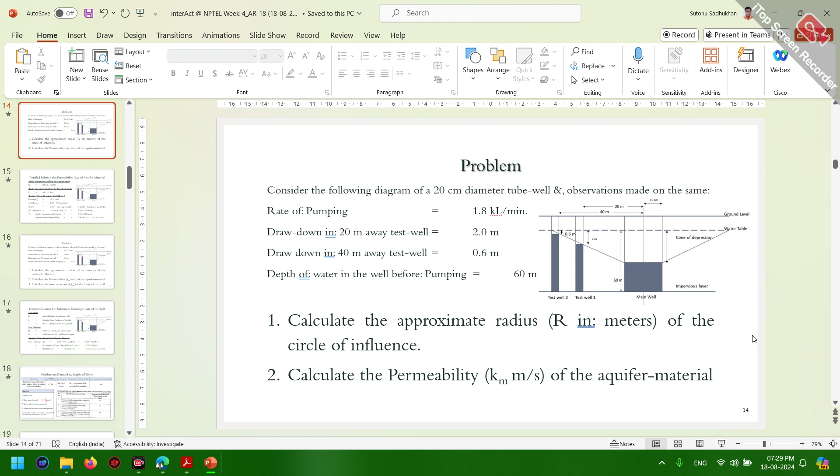Because if nobody joins, we won't have to wait for people to answer. That's why we are waiting. We will start after 1 minute or so. So in the meantime, let me share my screen. And for the sake of recording audio, I will be commenting on the slides.

Okay, so nobody has joined. I'll not turn on my camera. So let's start.

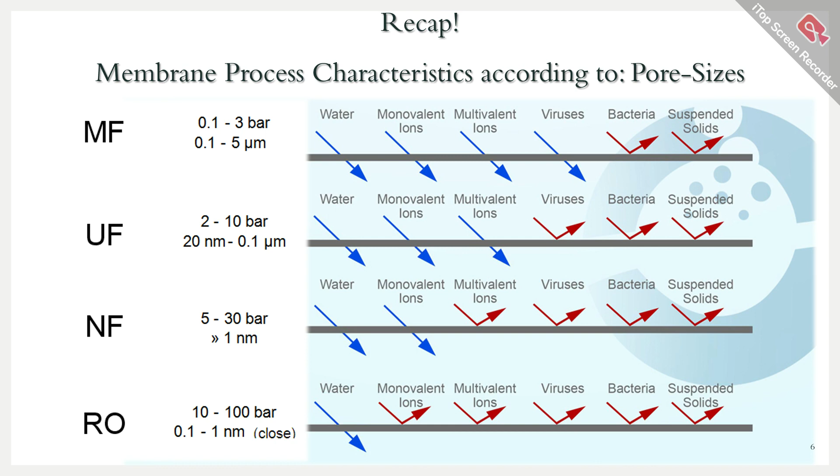Moreover, above ultrafiltration, in case of nanofiltration, the multivalent ions which cause hardness are retained. And in case of reverse osmosis or RO, even monovalent ions are retained, and almost distilled water comes out. We also discussed the different ranges of pore size and the pressure applied for filtration through these different types of membrane modules.

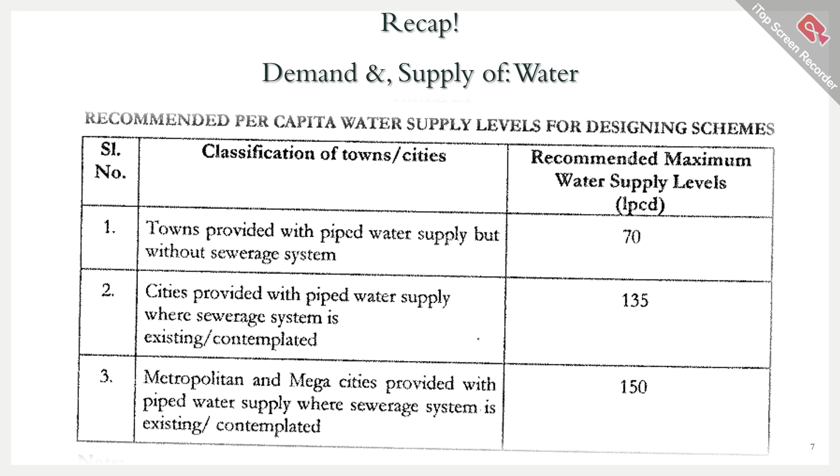We also promised in the last class that we would discuss a problem based on the demand and supply of water. There was a table given where recommended per capita water supply levels for designing a scheme was given. So we were supposed to start a problem based on this table, but unfortunately one student approached me on social media saying he has a doubt regarding one aquifer problem.

The problem is based on an aquifer, and he was not getting the correct answers. So I prepared a detailed explanation for the aquifer problem so that people get confidence, and even if there is some problem with the question, people can identify that themselves and answer accordingly, or be confident whether, if the answer is not matching any of the options, they will be given marks, or everyone attempting will be given marks. So anyone of that can happen, but I strongly encourage you to know the basics so that you are confident enough to answer, even if the correct answer is not given in the options.

Okay, so now let's start with that problem. The above problem we will discuss at a later stage. So first I will discuss the principle of hydrostatic equilibrium of liquid. What is it? The equi-hydrostatic property of water, basically.

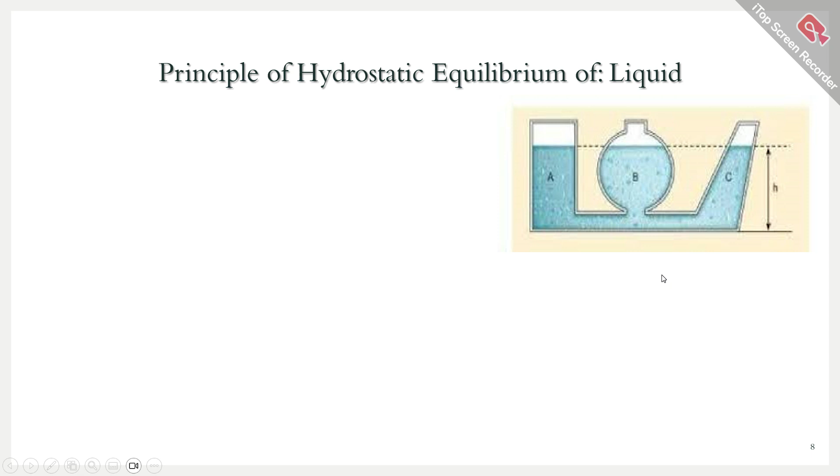This principle is used for extracting water via artesian well. There are different types of layers inside the earth's crust. If you see the interior core of the earth, at the outermost layer there is crust soil, which is a part of the earth's crust.

Inside the earth's crust there is the mantle layer. Mantle has two parts: one is outer mantle and another one is inner mantle. And even inside the mantle layer, at the center point of the earth, there is the earth core. The earth core can also be divided into outer core and inner core.

So the points we are talking about are situated at the earth crust level, not at the mantle or core level. So let's say at the earth crust level, there is groundwater present, and groundwater recharge happens if the lithographic structure of the earth is like this, then it may charge from the surface.

Rainwater may come, and you can see there are different types of stratas, like impervious strata, which is not a very good conductor of water, but the pervious strata is permeable to water. So through the pervious strata, water will come into the ground with the help of rainfall from the surface of the ground. But through the impervious strata, water will not come.

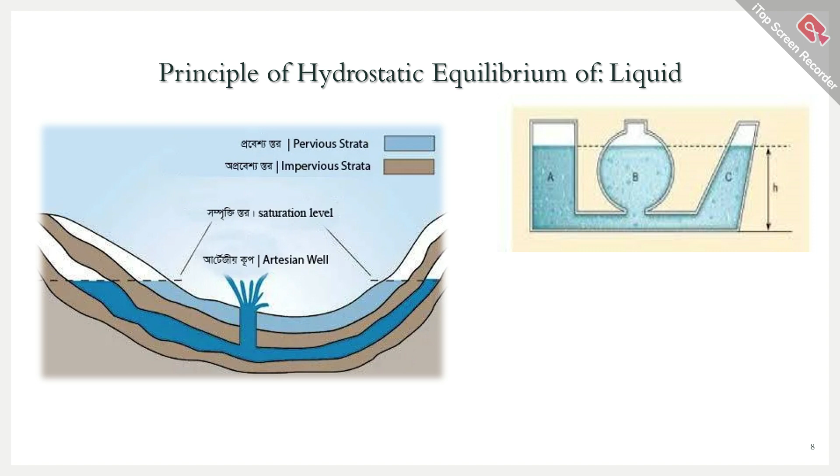In this way, if there is a rock mountain at the valley, people can get water with the help of these artesian wells. Now, this principle of hydrostatic equilibrium is also applied in many engineering cases, just like hydraulic lifting and domestic water supply from municipal tanks.

The tank is situated at a particular height, and from that height, the water is basically at the starting level. First, from the water source, the water is treated and pumped to the overhead tank, and from that tank the water is supplied to the household via the tap.

If the tap is open, due to the hydrostatic equilibrium principle of water or liquid, the water will try to attain equal height in households similar to the tank level.

So if the tank is above the highest households, then households will get the water. But if the tank is below the height of the highest household, then the highest levels of the households may not get the water.

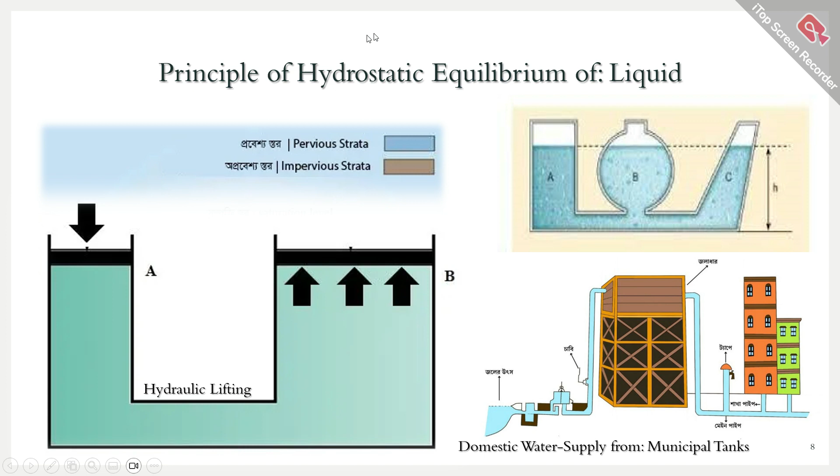So this is the hydrostatic equilibrium of liquid. Sometimes what happens, if the pipeline is very long, friction pressure drop also occurs, or if the pipeline is a lot branched. Then also, due to the pressure drop, the water doesn't reach the equivalent height of the tank. But if we assume zero pressure drop through the pipeline, then the water should achieve the equal height of the tank. So this is called the hydrostatic equilibrium principle of liquid.

Then only from the bottom the water will enter. So now the aquifer or groundwater pocket that is situated between two confining beds or impermeable rock layers - what will happen is the aquifer present in between is called the confined aquifer, because it is confined between two confining beds.

But if only one side, the lower side of the aquifer, is surrounded by the confining bed, while the upper side of the aquifer is open to the atmosphere, then it is called an unconfined aquifer. So it's not always open to the atmosphere - the upper layer is basically not confined by any rock. It may be confined, it may be open, or it may be confined with a permeable soil.

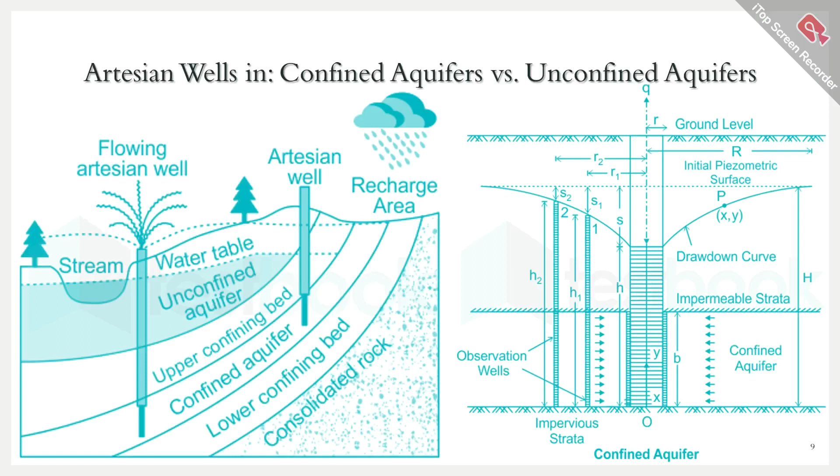So for the confined aquifer, if we look at the governing equations, those are given by Thiem's formula. Under this formula, discharge Q, that is volumetric flow rate, is given as 2 pi b km into capital H minus small h, divided by ln of capital R by small r, where km is nothing but the permeability of the aquifer material.

Capital H is the maximum height of the water bed below the ground level, and small h is any height that is smaller than or equal to capital H, which is basically - if we try to withdraw water through the well, there will be a cone formation.

It is nothing but a hydrostatic gradient. So the water height at a particular location, at a particular small r distance from the center point of the well, if we try to find out the cone height with the help of digging a test well, then at a distance small r from the center point of the well, we will find the height small h, which is the height of the water cone at that particular distance small r from the center point. So this is the explanation of this formula.

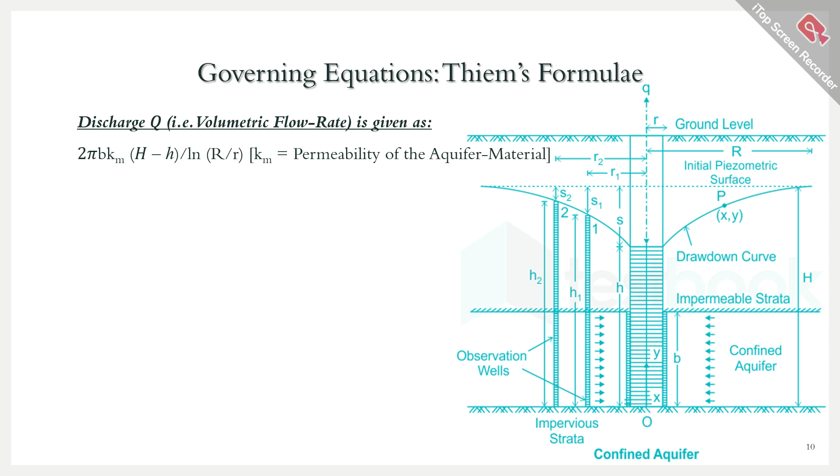Now in case of unconfined aquifer, where there is no impermeable or impervious strata present inside the aquifer, it is basically open. The governing equation that gives the discharge in case of this aquifer is given as q equals pi into km, this 2b term is not there, whole into capital H square minus small h square, divided by ln of capital R by small r. If we simplify this pi km and ln, it gives you capital K into capital H square minus small h square, divided by log of capital R by small r.

Where this capital K is written in terms of km, that is the permeability of the aquifer material, which is nothing but capital K equals pi into km divided by 2.303, the aquifer transmission coefficient or constant. So the aquifer transmission coefficient is a function of the permeability of the aquifer material, and this function differs for unconfined versus confined aquifers. In case of confined aquifer, K confined equals 2 pi b into km divided by 2.303. And in case of unconfined aquifer, K unconfined or Ku equals pi into km divided by 2.303.

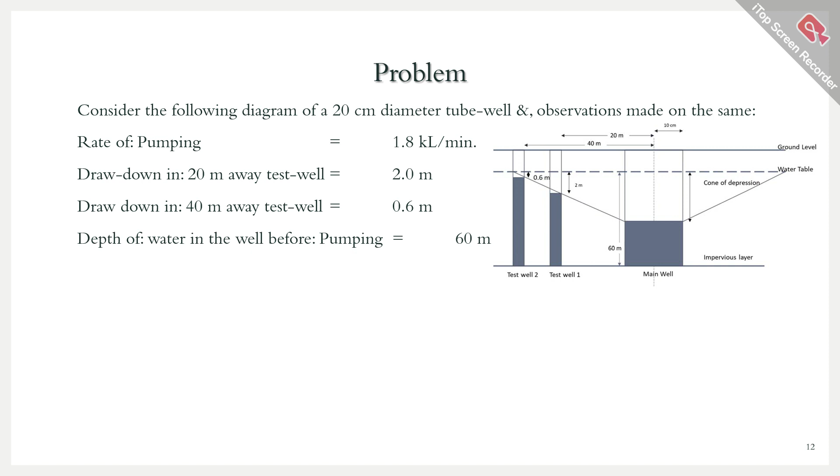Drawdown in the 20 meter away test well is given as 2 meter. Drawdown in the 40 meter away test well is given as 0.6 meter. Depth of water in the well before pumping is 60 meter.

So we can assume that before the starting of pumping, the water was at a 60-meter height in the main well. After starting of pumping, beyond the zone of influence of the cone, the water height will be 60 meter.

Drawdown of the 40-meter away test well, that is test well 2: the drawdown means 0.6 meter, so the water height is basically 60 minus 0.6 meter, that is 59.4 meter for test well 2.

And for test well 1, the drawdown is 2 meter. That means the water height in the column based on the cone in test well 1 is 60 minus 2 meter, which is 58 meter.

Now based on the observations, we have to calculate the approximate radius R in meters, which is the radius of the circle of influence.

There will be a point where the water height will be 60 meter. Beyond that point, at every place, the water height will be 60 meter. So we have to find that particular point.

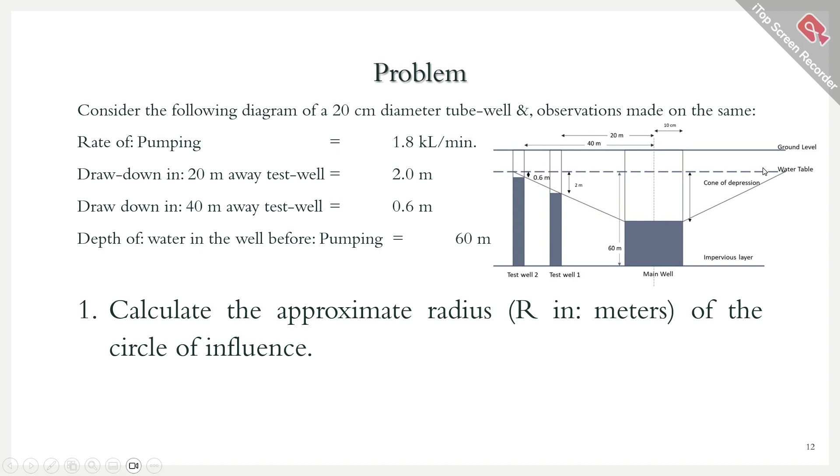The distance of that point from the center point of the main well will be the capital R. That is nothing but the approximate radius of influence, or radius of the circle of influence. So let us find out the detailed solution for the radius of influence.

If we apply Thiem's formula for unconfined aquifer, it is something like this: Discharge Q equals capital K, which is the constant or coefficient, into capital H square minus small h square, divided by log of capital R by small r.

With respect to test well number 1, which is 20 meter away from the center point, discharge Q equals K into 60 minus 58 square divided by log of capital R by 20. Here small h is the height of water inside test well 1, and small r is the distance of test well 1 from the center point, which is 20 meter.

So if we calculate the discharge Q with respect to test well 1, this will be the formula. At capital R, which is the radius of influence, the height of the water is 60 meter, if we can draw a hypothetical test well at the radius of influence of the cone.

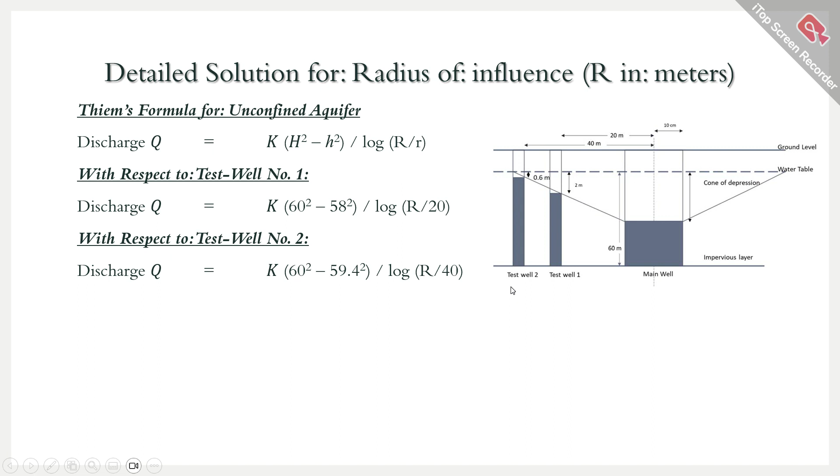So the minimum radius from where the water height 60 starts getting established, that place is basically the radius of influence, the distance of that point from the center point. At a distance of 40 from the center point, the water height inside test well number 2 is 59.4 meter.

Then equating both the above, because the test wells are just to measure the height of water based on the surface of the cone when we are drawing water from the main well, all the discharges will be basically the same, whether calculated based on test well 2 or test well number 1. That doesn't matter.

So discharge Q will be: K into 60 minus 58 square divided by log of R by 20, equals K into 60 minus 59.4 square divided by log of R by 40.

Okay, so just forget about the discharge K, cancel out K from both sides, then things become something like this. 60 square minus 58 square becomes 236. Whole into log R by 40 comes at the left hand side, which becomes log R minus log 40 equals to 60 square minus 59.4 square becomes 71.64, and log R by 20 comes from left to right and becomes log R minus log 20.

236 minus 71.64, this log R's coefficient comes at the left hand side, whole into log R equals to this 236 minus log 40 comes to the right hand side and becomes positive: 236 into log 40 minus 71.64 into log 20, which was already present in the right hand side.

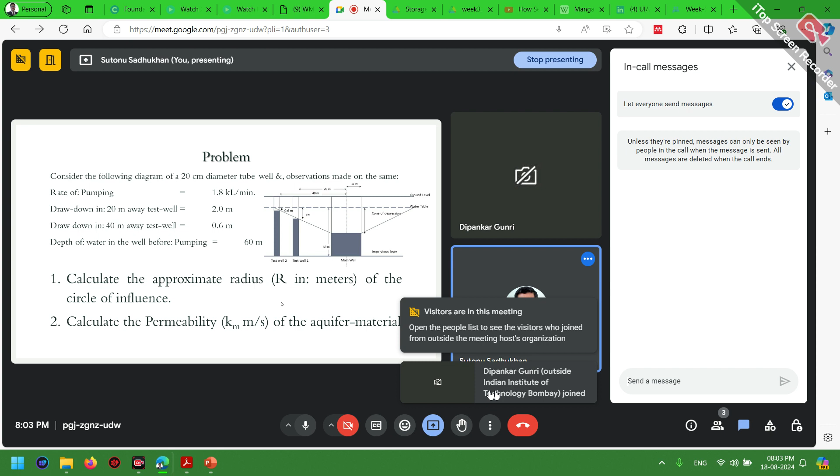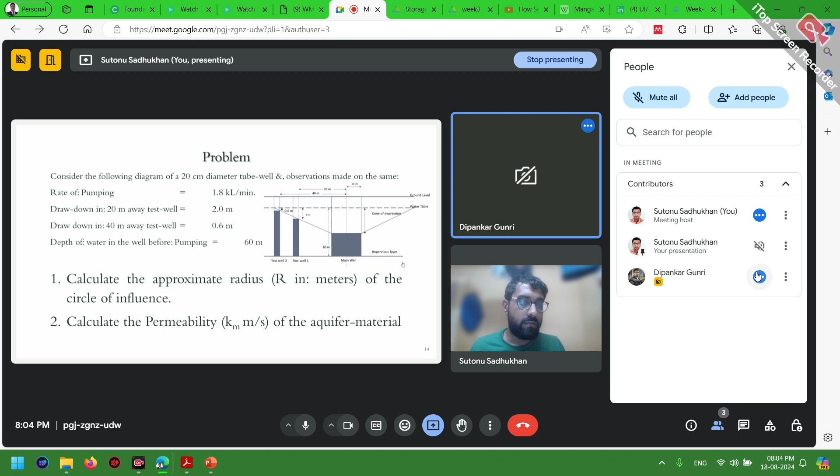Welcome Dipankar. Previously basically nobody joined, so I was just continuing for the sake of recording. I will just repeat the things once again for you. One student was there who actually contacted me stating... do you want to say something? Okay. So one student was there who basically contacted me stating... yes, please. Okay. So that student... Dipankar has left. Okay, let me continue. If he joins, I will brief him the introduction.

So now detailed solution for permeability Km of the aquifer material.

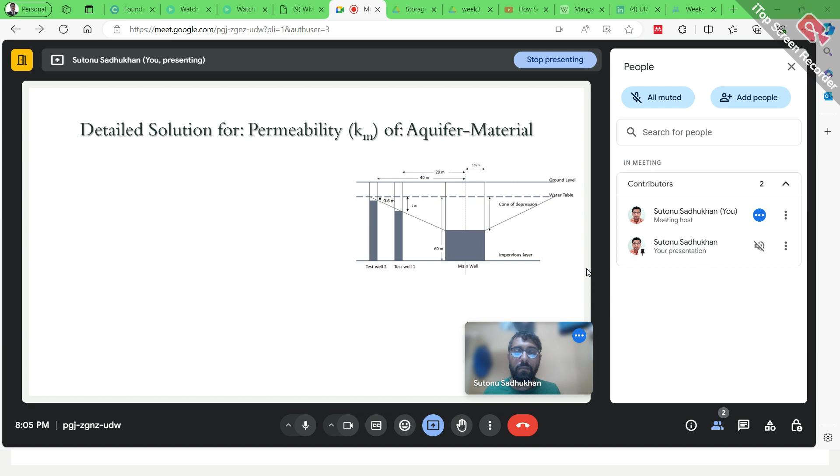Let me switch off my camera. No need, okay.

So aquifer transmission coefficient for confined aquifer is given as Kc equals to 2 pi b into Km divided by 2.303, that we have seen earlier. Now aquifer transmission coefficient or constant for unconfined aquifer is given as Ku or K equals to simply pi into Km divided by 2.303. So basically Ku into 2b equals to Kc, or Kc equals to 2b into Ku. This also you can infer from these two formulas. Or simply Kc equals to 2 pi K, 2bk.

So now applying Thiem's formula to test well number 1, you can apply that to test well 2 also, or you can apply that even at the radius of influence also. If you apply it to test well 1, then discharge Q becomes 1.8 kiloliter per minute, which is nothing but 1800 liters per minute, right? Which is nothing but equals to, based on the formula, capital K into capital H square minus small h square divided by log of capital R by small r.

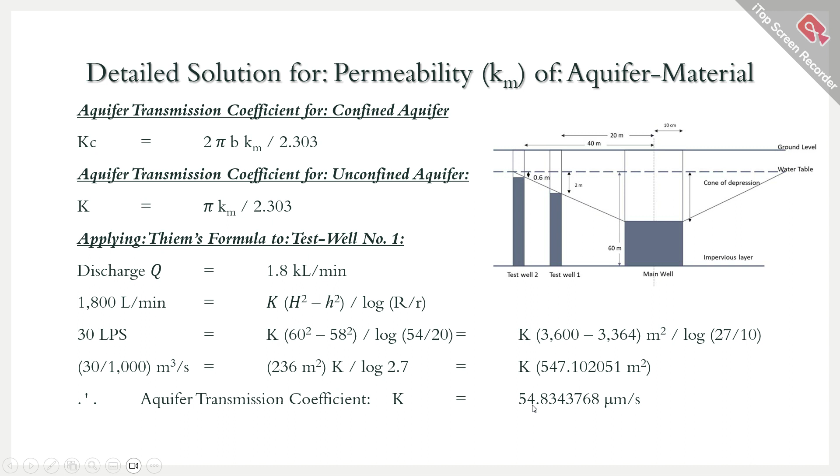Hence, aquifer transmission coefficient K is nothing but 0.03 divided by 547.102, which is nothing but 54.835 micrometer per second. Micro means 54.83 into 10 to the power minus 6 meter per second. This unit will be meter per second because meter square and meter cube get cancelled, becomes meter per second. So, 54.834 into 10 to the power minus 6 meter per second, that means micrometer per second.

From the aquifer transmission coefficient of unconfined aquifer, we can get the value of the permeability of aquifer material, which is nothing but small km. This small km becomes 2.303 into capital K divided by pi, in case of unconfined aquifer, which is nothing but 54.834 into 2.303 divided by pi, equals 40.2 micrometer per second. Units remain the same for pi, and 2.303 has no units, so units remain the same.

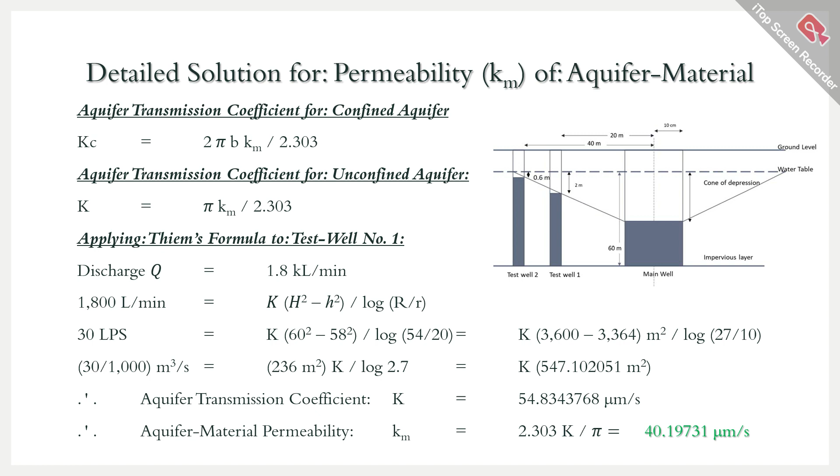Hope it is well understandable. So we have calculated the permeability in this way, which is nothing but 40.2 micrometer per second for the aquifer material. Now the third question is...

Based on whatever we have calculated till now, we have to calculate the maximum rate, that is QM, of volumetric discharge of the well. So what will be the maximum rate?

As we gradually withdraw water, the rate will decrease, right? But when the height was 60 meter, that 60-meter height is where it is at capital R, which is nothing but your radius of influence. There, the rate will be the maximum. Based on that, we will now go through the detailed solution for maximum discharge rate of the well.

To calculate that, first we will again revise whatever data are given. Capital H is given as 60 meter, which is at the radius of influence, that is capital R. At the radius of influence, the height is capital H, which is nothing but 60 meter. Small h is 0 meter for maximum discharge of the well, because we are calculating the maximum discharge, not the high water, where the discharge is maximum at that moment of time, the small h will be 0.

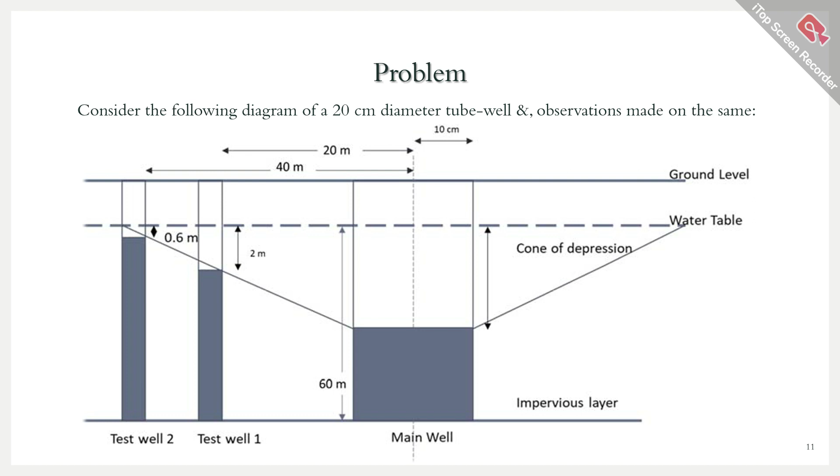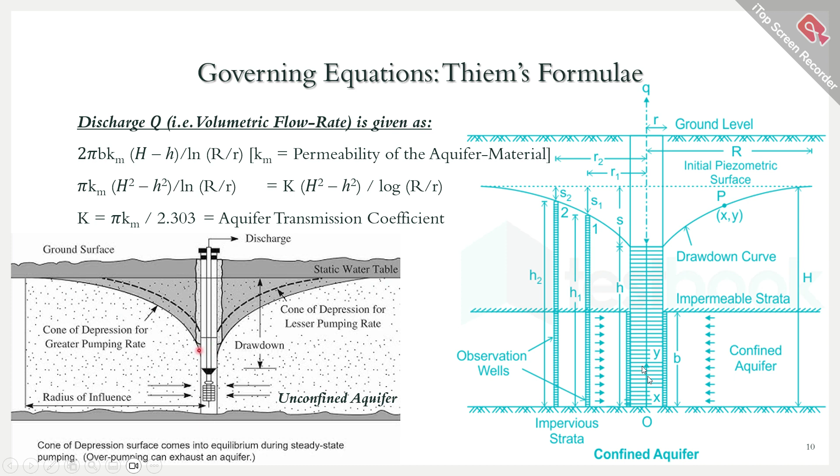The cone is actually not shown very well here, so it will be something like this, a slopey nature. We can go back to the earlier picture. At radius small r, which is 0.1 in our case, at 0.1 distance and below also, from 0 to 0.1, around the center point of the main well, the height of the water will be basically almost 0 for maximum discharge. So it is kind of a slope, not a straight line as it is shown.

So at that particular height, what will happen? We are coming into that. So small h will be 0 meter if we are withdrawing water at a maximum. Now small r will be, as I told, 10 centimeter, that means 0.1 meter, which is the radius of the principal well.

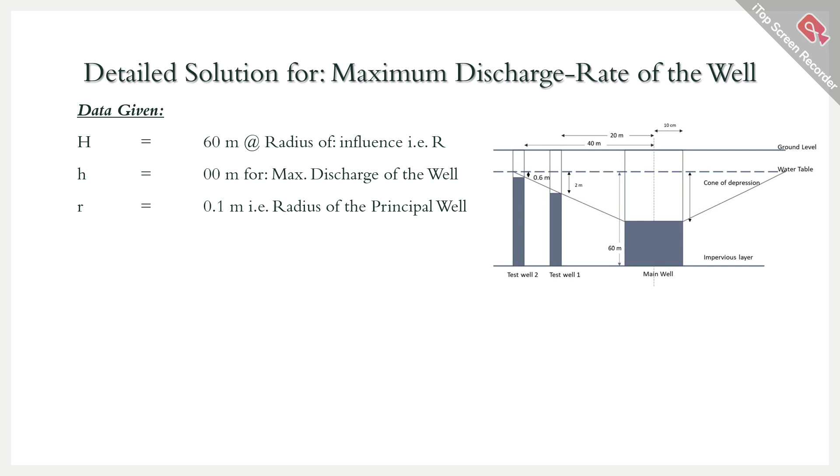That is the radius of the principal well. So there is one problem here: it will not be 10 centimeter... no, 10 centimeter means 0.1 meter. Yes, it's 0.1 meter. Yeah, it is correct. No issues with that.

So the data obtained that we got while solving our previous two problems: it is capital R, the radius of influence, at capital H, the height of the water, at y direction is capital H. Then the x direction, radial direction, becomes 54.11 meter, which is nothing but the radius of influence. Now capital K, the AT coefficient, that is aquifer transmittance coefficient or constant, is 54.83 micrometer per second, which we calculated earlier. Based on these two things, the data given and data obtained, we are going to apply Thiem's formula for volumetric flow rate.

So, for maximum discharge QM, K into capital H square minus small h square divided by log capital R by small r, will be K capital H square divided by log capital R by small r, because small h is 0 here for maximum discharge of the well. So, it becomes 0. K H squared by log R by r. It becomes the expression of the QM.

Upon simplification, we just put the values of K, which is nothing but 54.83 micrometer per second. Now, capital H is 60 meter. 60 meter whole square divided by log of capital R by small r.

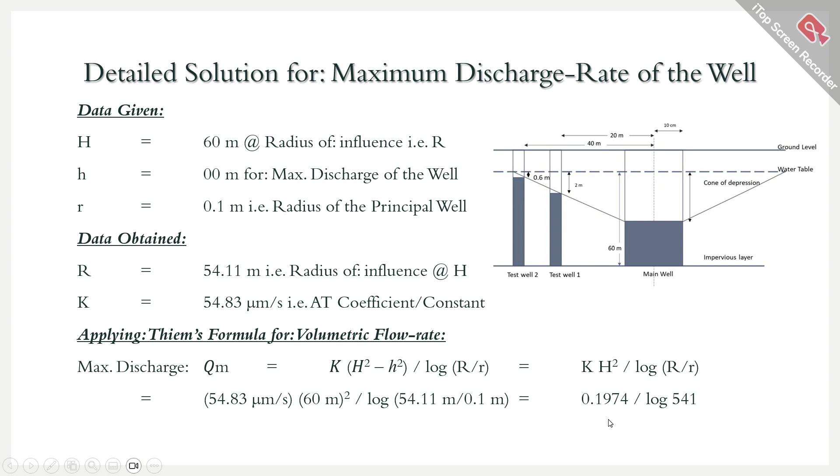Now, which is nothing but equals to 0.072221 meter cube per second equals to 0.072221 into 60 second, which is nothing but equals to 4.33 meter cube per minute or kiloliter per minute, because LPS means liter per second, LPM means liter per minute. Why is it so? Because 1 minute equals to 60 seconds. So that's why we have converted here meter cube per second to meter cube per minute.

Kiloliter means meter cube only. Kiloliter and meter cube, these two units are one and the same.

Okay, so till now, whatever I have discussed, nobody has joined. So nobody has any problem.

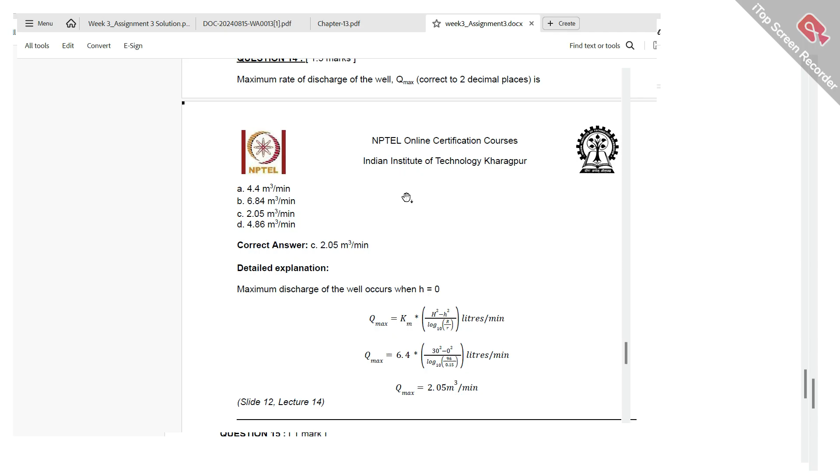Now we can just go where? We can just go to one problem that was given in our last week's assignment. So people had many confusions on that assignment. So we'll look into that. The solution of that assignment is also shared. If we see that...

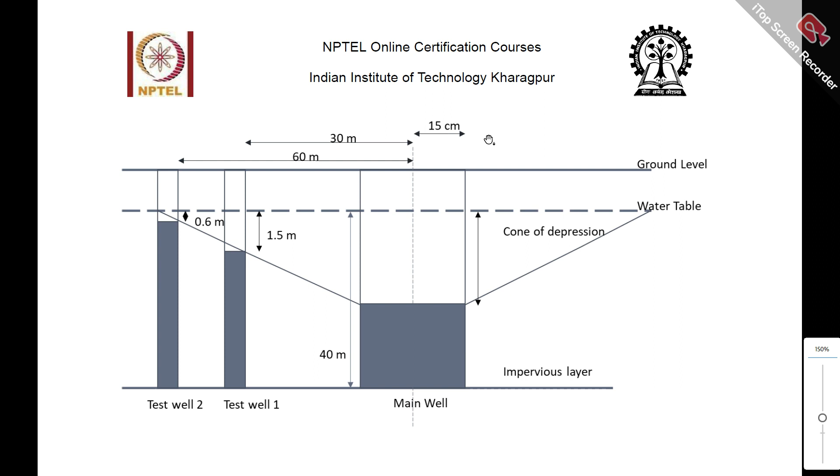The assignment problem was the same, only some data was different. Just like in our case, R1 and R2 were 20 meter and 40 meter; here they are 60, 30 meter, 60 meter. In our problem, the radius of the well was 10 meter, but here in this case the radius is 0.1 meter; here it is 0.15 meter. Our capital H is 60 meter, but in this problem, the capital H is 40 meter. In this way, the data are only different, but all the other things are the same.

So now we can see the approximate radius of the circle of influence in meters that one has to calculate. Based on that, the solution sheet has correctly calculated it to be option C, 96.

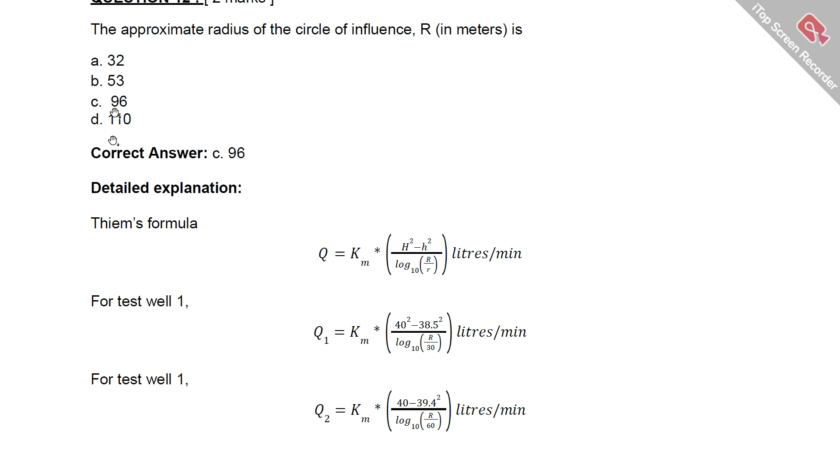In the second problem, that is problem number 13, just like our problem, here also they have told to calculate the transmission constant of the aquifer, that is capital K, and after solving they have calculated it correctly to be option C, 6.4.

But when problem number 14 came, where we have to calculate the maximum rate of discharge, Qmax, they are utilizing the same formula. Qmax means Q was given as 1500 earlier. Now we have to calculate it in terms of meter cube per minute. So they have capital H squared, just applying Thiem's formula: capital H squared divided by log of R by r, into Km. So Km they have calculated earlier to be 6.4, and this they have put correctly.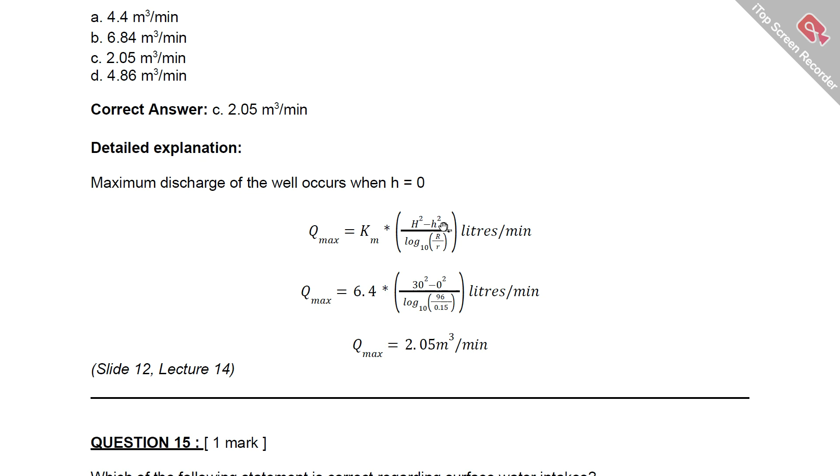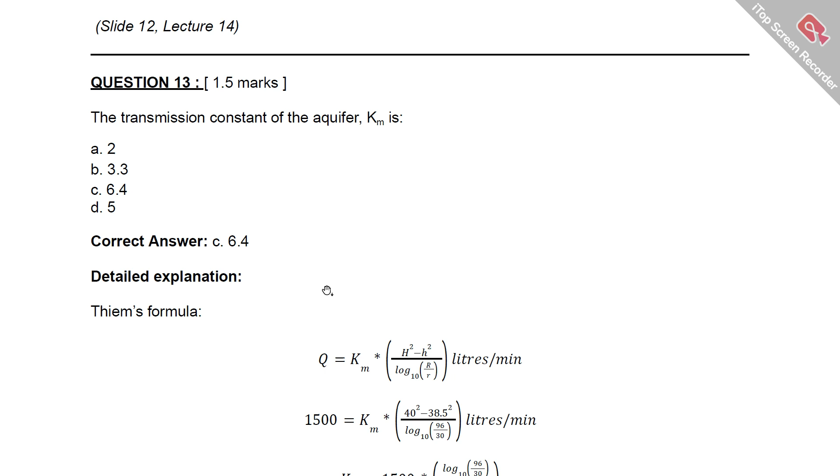Log 10 R by r: this R will be radius of influence, and this r will be the radius, sorry, of the main oil, which is nothing but 0.15 meter. All are in meter; this is not in meter though, but after multiplication it will be adjusted. For capital R, they have calculated 96 meter as the radius of influence or the radius of the cone at the top level, at the water table level. So this they have correctly identified and put in solving problem number 14 as 96.

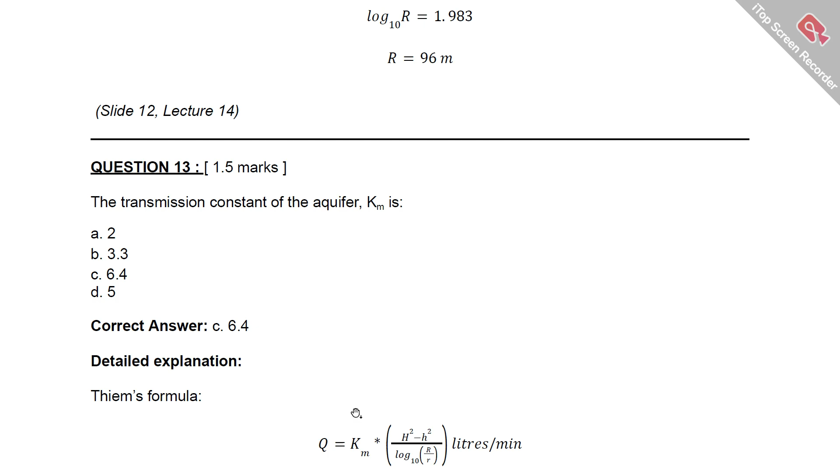But you can see this H, capital H square minus small h square, small h square is 0, is okay. But this capital H will not be 30 here. You can see from the problem, what is the capital H? Capital H is 40 meter. So if you put it correctly, capital H to be 40 in question number 14, what will happen?

They have obtained 2.05 meter cube per minute because they have put it wrongly as 30. But this is not 30, this is 40 in our case. So the answer they are getting here is not correct.

And we hope either everyone will be given marks or no one will be given marks for this question. So it is basically wrong. The options provided in the question are wrong.

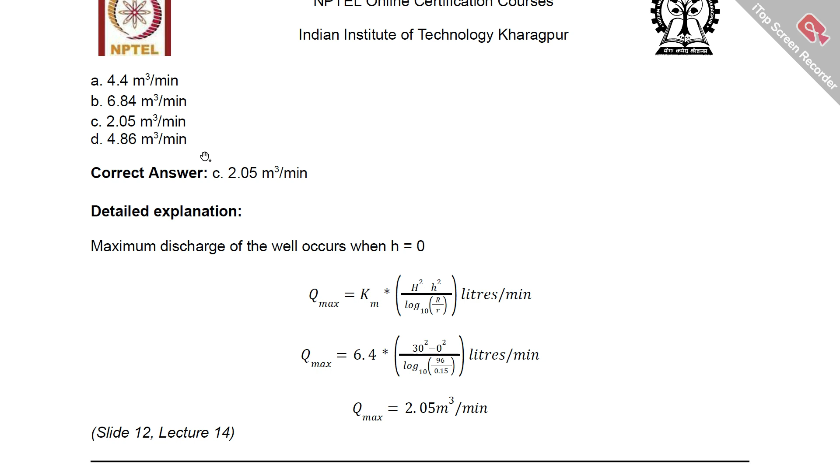So what is the thing? It may so happen that sometimes people do mistakes. So it was a mistake basically. The problem was for 2 marks, I guess. Question number 14 was for 1.5 marks. So either 1.5 marks will not be given to anyone, or it will be given to whoever attempted it, because the correct option is not there.

Now we'll move on to our promised problem that we said we would be solving in this class.

This is the problem based on demand and supply of water. There is a table in the first column. The type of city is given as cities provided with piped water supply where sewer system is existing. The population of the community is given as 8,000. Source of water is given as surface water. Characteristics of water to be treated is given as only suspended and bacterial impurities are present inside the water. And the number of working hours of the treatment plant is given as 18.

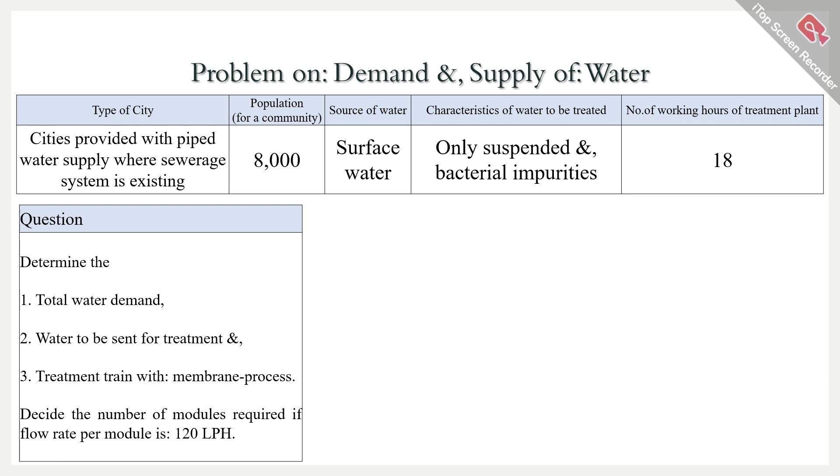Based on this data, the questions are: number one, determine the total water demand. Number two, determine the water to be sent for treatment. Number three, determine the treatment train with membrane processes, and additionally decide the number of modules required if flow rate per module is 120 liters per hour. This is just a subcategory of question number three. That's all.

This is the chart that I showed you at the beginning of the class. The recommended per capita water supply level for designing schemes is given, with three classifications of towns or cities. Number one is towns provided with piped water supply but without a sewerage system. For that, the recommended maximum water supply level in LPCD unit is 70 LPCD. LPCD means liters per capita per day, also called liters per head per day, or LPHD.

The second category is cities provided with piped water supply where a sewerage system is existing or contemplated. There, the recommended maximum water supply level is given as 135 LPCD. The third category is metropolitan and mega cities provided with piped water supply where a sewerage system is existing or contemplated. There, the maximum water supply level is provided as 150.

So you can see, as the cities are getting bigger, as we are installing piped water supply or recycling the sewerage system, the recommended maximum water supply level also gets increased. If the city is even bigger, that is metropolitan or mega city, then the recommended water supply level is even more based on the demand, right?

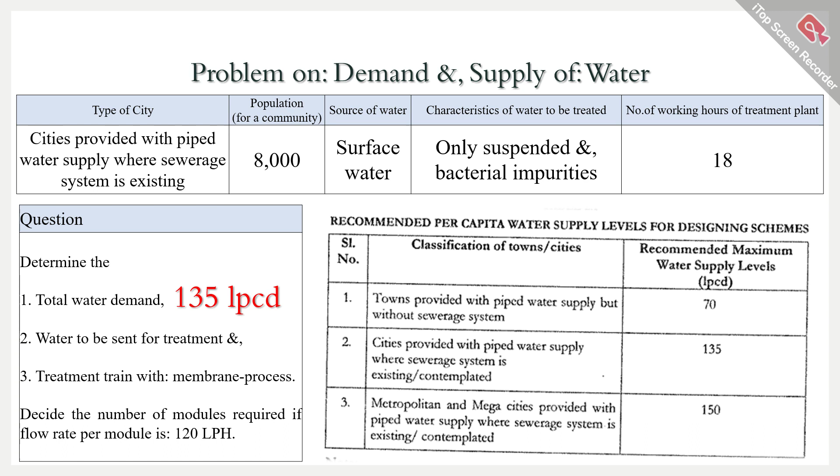Now let's dive into question number 2, which is water to be sent for treatment. To calculate the water to be sent for treatment, we have to get the total water demand in liters per day. To get this, we multiply the population of the community with the per capita demand, which is 135 liters per capita per day, into 8,000, the number of population we calculated. After multiplication, it comes out to be 10 lakhs 80,000 liters per day.

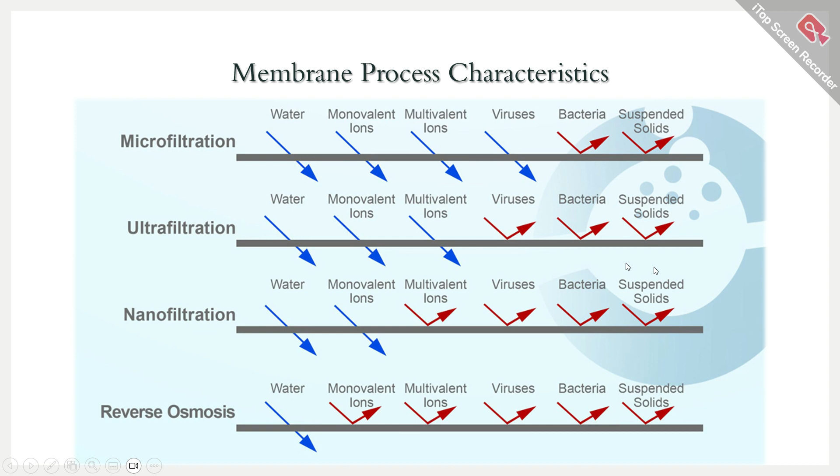Only suspended solids and bacterial impurities are present, that means ultrafiltration, nanofiltration, and reverse osmosis are not required because viruses are not present. Multivalent and monovalent ions are not mentioned to be separated. So that means if you only have to separate bacteria and suspended solids, microfiltration will be sufficient. Why not ultrafiltration, nanofiltration, or RO? They also separate these, but we will come to that in a later stage.

So yes, the earlier problem was 10 lakh 80,000 liters per day. Here the source water contains suspended solids and bacterial impurities only. Hence microfiltration membrane treatment scheme will be sufficient.

Now let's ask again that question: ultrafiltration, nanofiltration, and reverse osmosis are also able to separate bacteria and suspended solids, right? So why microfiltration and not the others? It is because microfiltration requires the least amount of pressure among all the other membrane processes. If there is a high pressure requirement, then the energy requirement will be more, and subsequently the electricity bill that the plant has to bear will be more. That's why, to minimize the operational cost, microfiltration will be sufficient. There will be no need of ultrafiltration, nanofiltration, or RO. I hope that is clear.

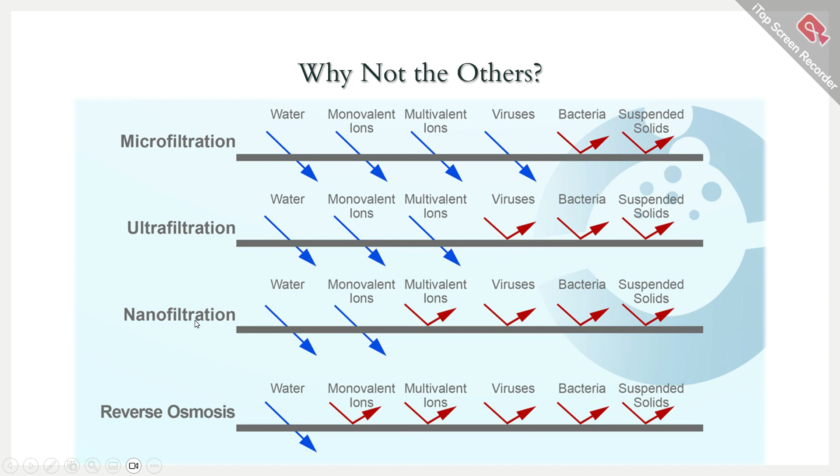So now it will be the MF scheme, meaning the microfiltration scheme. Now we have to decide the number of modules required. The flow rate per module is given as 120 liters per hour. Water to be treated by a single module within the total working hours, which is 18 hours given in our question, will be calculated by multiplying the flow rate per hour by 18 hours, giving us 2160 liters. This is the daily number of working hours, and this is the volume of water that needs to be passed through the membrane per day.

The actual 24 hours demand needs to be met within 18 hours of operation time only. Whatever demand we calculated, 135 liters per capita per day, or 10 lakhs and 80,000 liters per day, this is the demand for 24 hours, because whenever the plant is not running, it's not like people are not using water. People are using water that time too. Maybe the plant runs in two shifts of 9 hours each with a gap of 1 hour in between, but it's not like for the other 6 hours people are not using water. So this liters per day is the water people use throughout the day, or the maximum demand usage.

Somebody joined, I think. Let's see who joined. Okay, none. Let me pause the recording for a moment. Resume the recording.

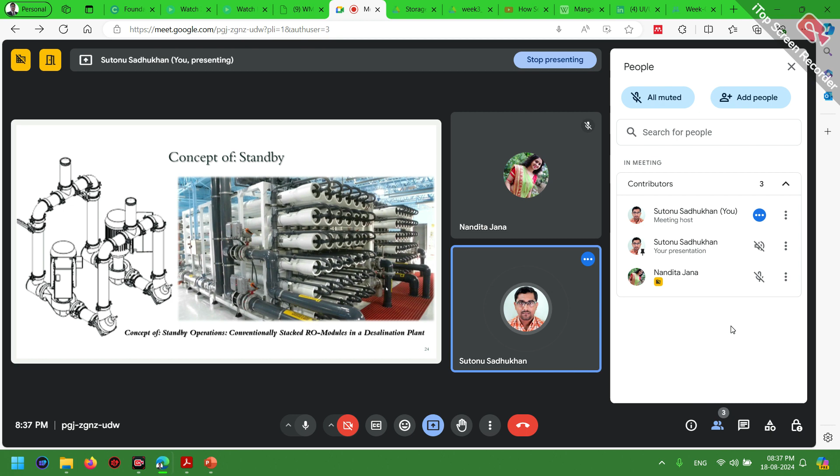So now, I have already explained the concept of standby. If one pump is in operation and it gets damaged, the plant should not be stopped for continuous operation. We can basically keep one pump isolated from the circuit and run the other pump in order to maintain the operation of the plant.

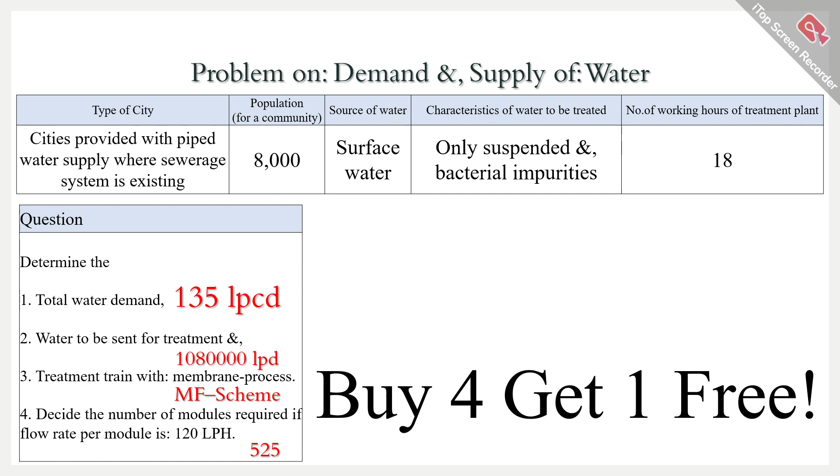Now we have solved all four problems: the total water demand, the water that needs to be sent for treatment, and treatment with membrane processes. Now, also considering the standby module, what will be the number of modules? That is 525. Now there is buy four get one free, one more problem: problem number 5. If one microfiltration train contains 25 modules, then we have to calculate the number of MF trains required.

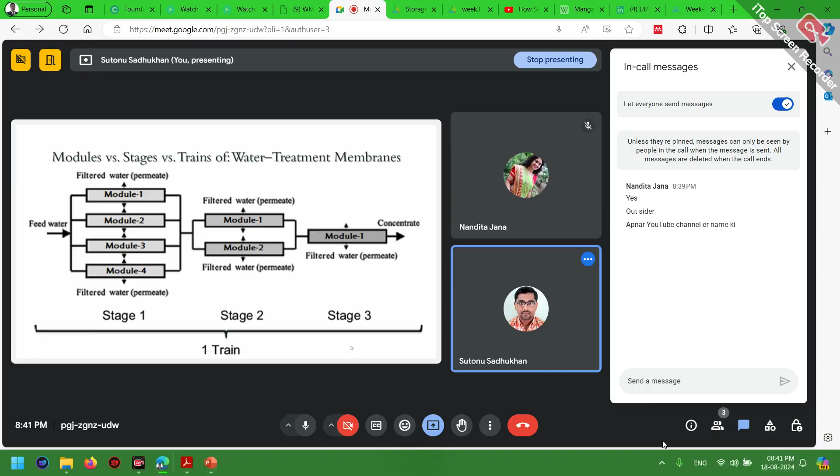Let's explain what is a membrane train. Basically, there are two types of membrane operation possible: one is parallel and one is series. Whenever we use series operation, that is for more and more recovery. Let's say we place one RO parallel to another RO; that's because the flow rate is more, and we have to cater to the amount of flow rate by placing more modules in parallel to each other. But the function of placing modules in series is to get more and more recovery, that is the idea here. So basically, if there are three stages, one train should contain 3 stages. If there are 2 stages, one train will contain 2 stages, and so on. One train may also contain just a single stage if we don't require further recovery.

Sometimes the permeate that is coming out of the plant is our focus, and sometimes the retentate or concentrate that is coming out of the plant is our focus, which is basically the case of fruit juice concentration.

Okay, so what is the time now? It's 8:44, we can run for 15 minutes more, up to 9 p.m. So I will go through some other MCQs.

The first one is economic water scarcity. What is it? If there are people who create the demand for water and there is a source of supply of water, even if there is sufficient source, if the management or infrastructure for distributing the water from the source to the demand side is not sufficient, then an artificial scarcity of water may occur. This is basically man-made water scarcity. Water source is there, demand is there, but scarcity occurs due to insufficient or ineffective management infrastructure, which is not distributing the water properly from the source to the people. This is called economic water scarcity.

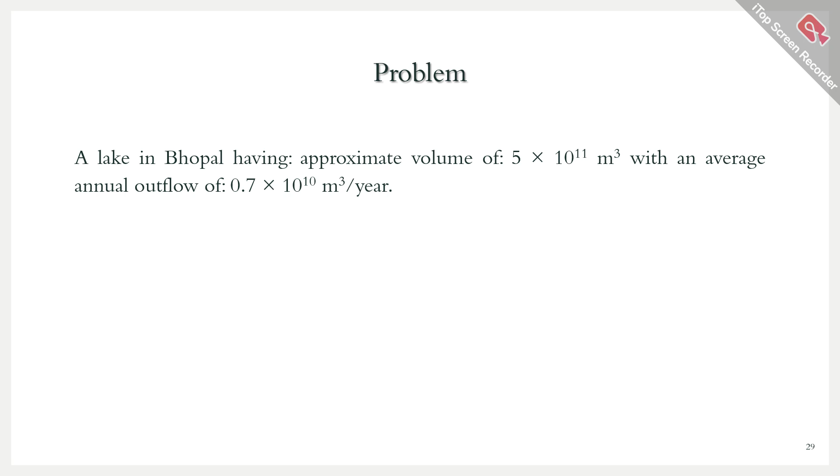So we will solve a problem based on the demand and supply of water. A lake in Bhopal has an approximate volume of 5 into 10 to the power 11 meter cube, with an average annual outflow of 0.7 into 10 to the power 10 meter cube per year. Calculate the HRT, that is hydraulic retention time, for the lake to the nearest integer. Option A is 70 years, option B is 72 years, option C is 74 years, and option D is 76 years.

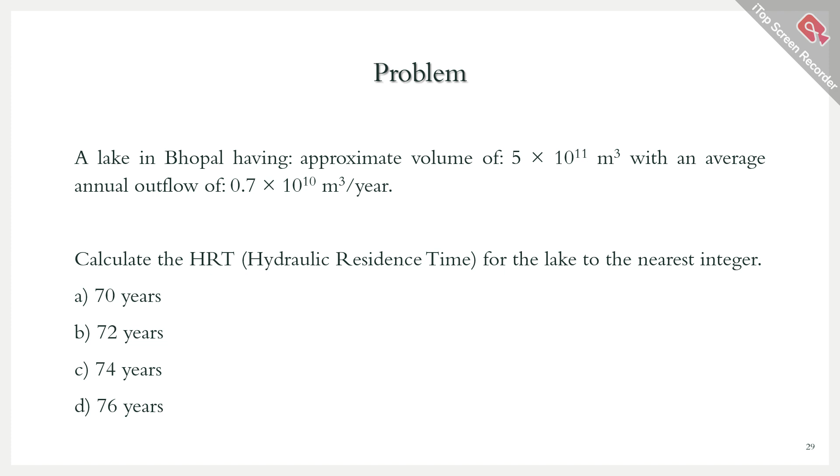So as no one is there, I will not wait for the solution of the problem. I'll just go through the detailed explanation.

To solve the problem, one concept is required, the hydraulic retention time. Let's say there is a completely mixed tank, sometimes called a continuous stirred tank, CSTR, through which liquid is flowing, with one flow-in stream and one flow-out stream. Under steady state condition, flow in equals flow out, meaning the height of water inside the tank is not changing if the incoming flow rate equals the outgoing flow rate. In that case, HRT, or hydraulic retention time, equals the tank volume divided by the outflow, which is the same as the flow in. If there is mass or solids present inside the tank, another concept is SRT, or solids retention time, which equals mass of solids inside the tank divided by mass of solids leaving. But in our case, only HRT will be required.

For our lake case, we can assume the lake in Bhopal as a completely mixed tank, where residence time is the average duration of a particle of water to pass through a phase of the hydrological cycle. Thus HRT, in our case, is the volume of the lake, 5 into 10 to the power 11 meter cube, divided by the annual outflow, 0.7 into 10 to the power 10 meter cube per year, which equals 71.43 years. This is the retention time of the lake. So option B, 72 years, is the correct option in our case.

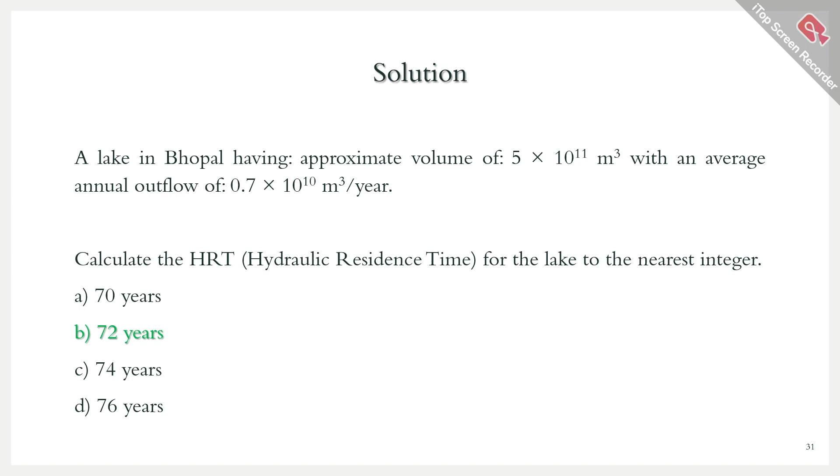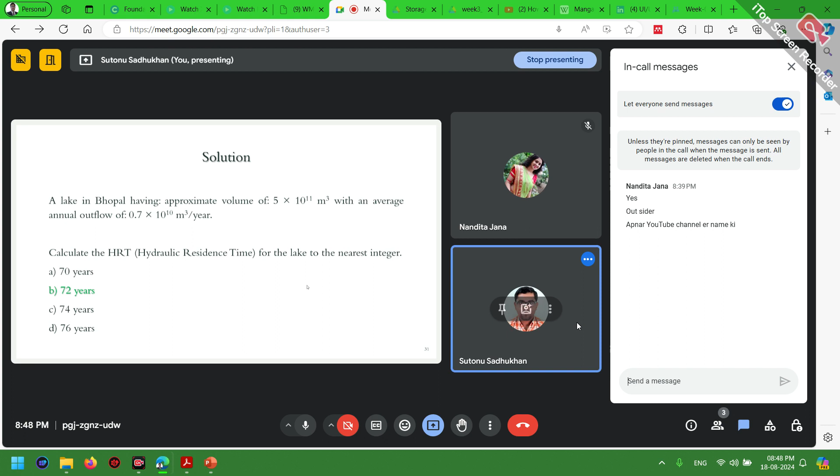Okay, so now let's move on to our next MCQ, which is a multiple choice question where one option will be correct. The rate of reaction depends on which one of the following? Option A is products, option B is reactants, option C is both products and reactants, and option D is none of them.

So the correct answer is both products and reactants, upon which the rate of the reaction depends. It may be a first order, a second order, or it may give feedback for a negative order reaction also, meaning the concentration is increasing while the rate of the reaction is decreasing. It may also happen. So both products and reactants are responsible for the rate of the reaction.

Now the next MCQ is: the ratio of the quantity of water retained by the material against gravity drainage to the total volume of the material of subsoil is defined as. Option A is porosity, option B is specific yield, option C is specific retention, and option D is permeability.

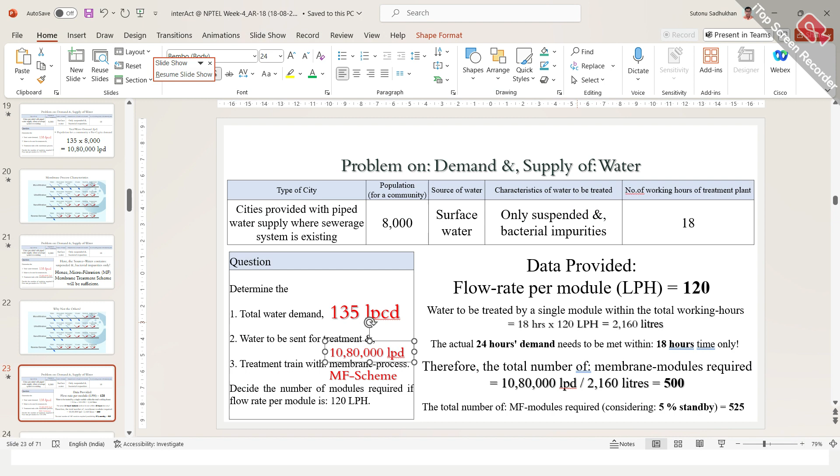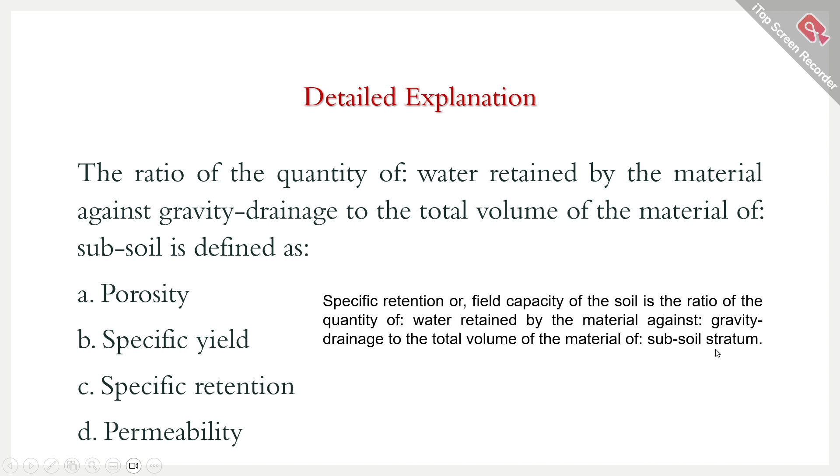Here the detailed explanation is something like this. Specific retention or field capacity of the soil is the ratio of the quantity of water retained by the material against gravity drainage to the total volume of the material of subsoil strata. That means specific retention is the correct answer in our case.

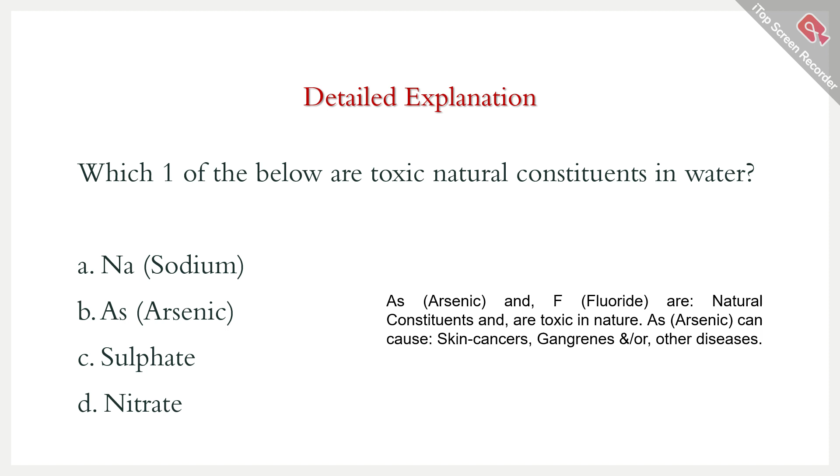So now the next MCQ is, which one of the below are toxic natural constituents in water? Option A is sodium, option B arsenic, option C sulfate, and option D nitrate. The detailed explanation is that arsenic (As) and fluoride (F) are natural constituents and are toxic in nature. Arsenic can cause skin cancers, gangrenes, and other diseases. Hence, arsenic is the correct answer.

Now the next MCQ is, the characteristics of fresh and septic sewage respectively are: alkaline and acidic, acidic and alkaline, both acidic, or both alkaline.

The explanation is something like this. The pH, that is the concentration of hydrogen plus ion, of fresh sewage is more than 7. The average range is between 7.5 and 9.5, hence fresh sewage is alkaline in nature. Now we know that in a septic tank the sewage remains for a certain time, so there are acidophilic bacteria and anoxic bacteria which basically degrade the sewage material. That's why the pH becomes acidic, that is less than 7.

In case of septic sewage, the pH is in the range of 6.5 to 4.5, hence septic sewage is acidic. So option A is the correct answer in our case.

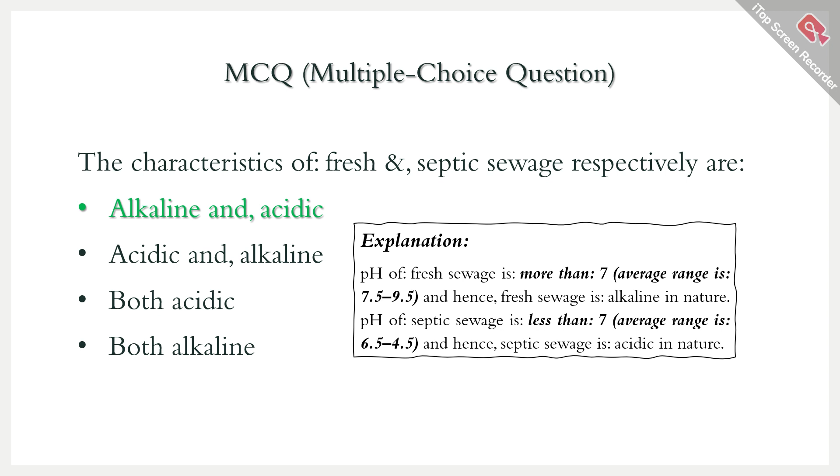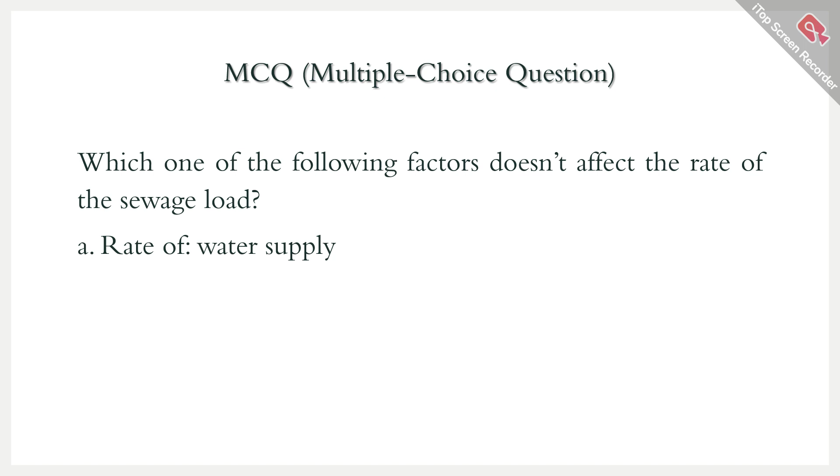So the next MCQ is, which one of the following factors doesn't affect the rate of the sewage load? Option A is rate of water supply, option B is population growth, option C is infiltration of groundwater, and option D is design of sewer system.

Option D is the correct answer, design of sewer system. Why are the other answers not correct? Because rate of water supply will increase the sewage load, since within the sewage treatment plant, the inflow consists not only of the sewage but also the water. If the water increases, the inflow increases, meaning the load increases, but the concentration of sewage present in the water may vary.

But as the rate increases, it increases for a certain purpose only, so the sewage amount increases. Population growth definitely increases the amount of sewage growth. If infiltration of groundwater happens, then the concentration of sewage present inside the inflow of the sewage treatment plant may get reduced. So all three of these factors affect the rate of sewage load.

But the design of the sewer system is something done at the very beginning, before the commissioning of the treatment plant, even before construction. So that's why this doesn't affect the sewage load during operation. This is the correct answer in our case.

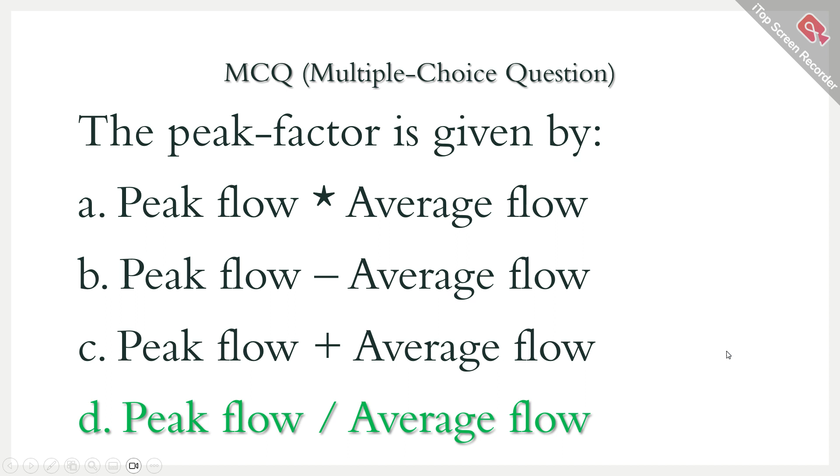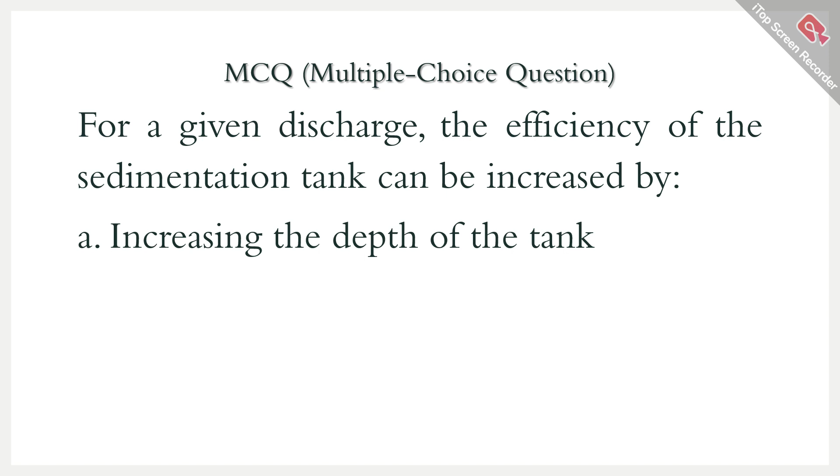The next MCQ is: for a given discharge, the efficiency of the sedimentation tank can be increased by option A, increasing the depth of the tank; option B, decreasing the depth of the tank; option C, increasing the surface area of the tank; and option D, decreasing the surface area of the tank.

The discharge is fixed. Now, how can we increase the efficiency of the sedimentation tank? Option C is the correct answer. If we increase the surface area of the tank, because surface area reduces the velocity of the incoming water. If there is a sudden drop in velocity, then the settling will be more. So if we increase the surface area of the tank, the drop in velocity, that is delta V, will be more, thereby increasing the sedimentation inside the tank.

Okay, so now let's see what is the time. Okay, so the grit chamber can be covered, I guess.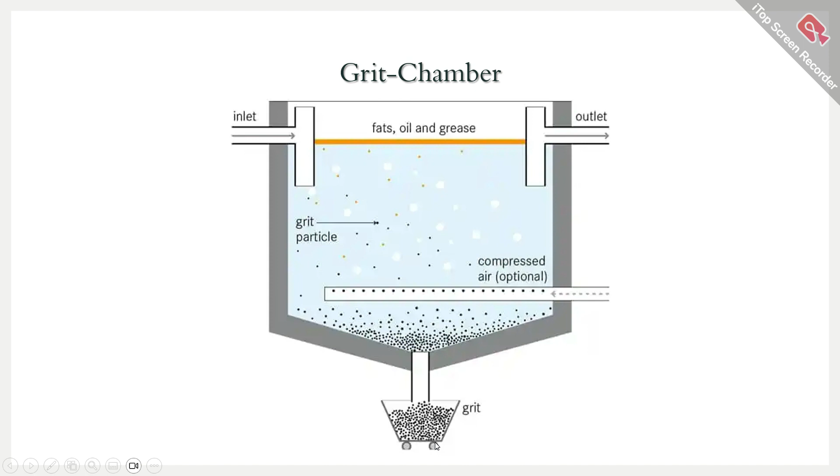After a certain amount of time, if there is sufficient grit present inside the water, or the grit rises above the compressed air, the pressure drop will be more. The energy consumed by the compressors pressing the compressed air into the grit chamber will increase. This way, you can understand that there is a sufficient amount of grit stored at the bottom of the grit chamber. Then we can stop the operation for the time being, or if there is a parallel grit chamber present, we can keep that in operation, isolate this one from the system, and take out the grit from the bottom chute. So this is the concept of the grit chamber.

There is one problem based on the grit chamber. I hope we can solve that in a later class.